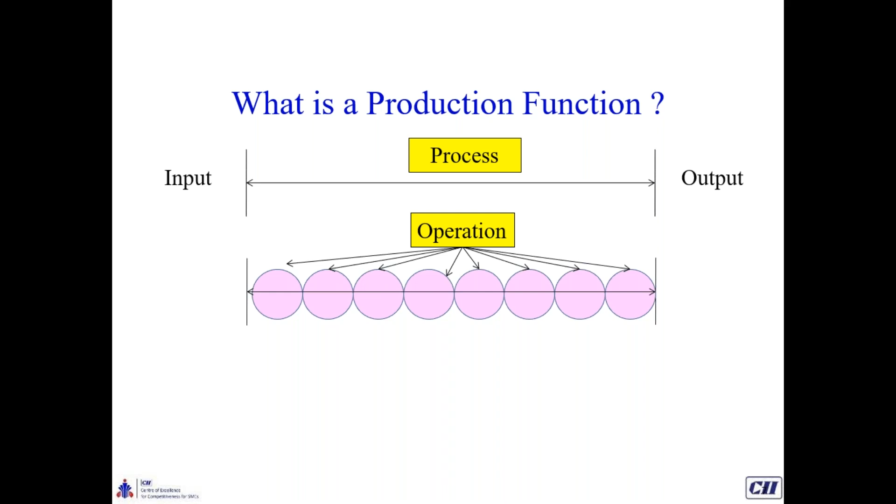And each operation is completed by an n number of activities. The process is input to output. A process is a summation of operations. There may be n number of operations to complete one process, and each operation may be carried out by

a number of activities. For example, if I want to drink water from a bottle, what I do is I pick up the bottle, open the cap, drink water, close the cap, and put it back on the table. So for a single operation of drinking water, I do a number of activities. Same is the case with drilling also.

For example, in drilling, what we do is we pick up the piece from maybe some trolley, put the piece on the vise, close the vise, use the handle to bring the drill down, drill the component, take the drill back to the original position, open the vise, put it in the next bin. So for doing a simple drilling operation, I need to do a large number of activities, and each activity is considered to be done in 4 to 5 seconds.

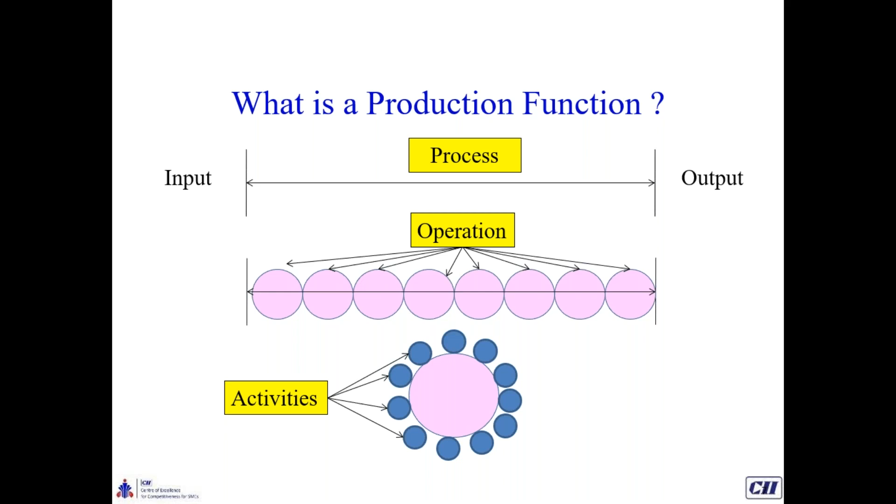When we say activities, the activities are further divided into 3 parts. They are value-added activities, non-value-added activities, and non-value activities in a waste form. For example, of a drilling machine: we have done 8 to 10 activities in drilling one component, but the actual activity which added value to the product was only one, when the drilling was done in that component. All other activities, from picking up, putting on the vise, closing the vise, bringing the drill down, are NVA.

But all NVAs are not waste. Some are essential also. For example, if we need to bind the product on a vise, that is an essential activity, although it's non-value-added. What is value added? Value added activities are those for which a customer is paying us. So in the case of the drilling machine, only one activity, when the drill enters the product and drilling is carried out, is value added. Otherwise, all activities are NVA.

But from those NVA, certain activities are essential. Essential means those activities without which value addition activities cannot be done. For example, we need to hold the product in a vise for the value added activity to be done. Okay, so that is NVA activities.

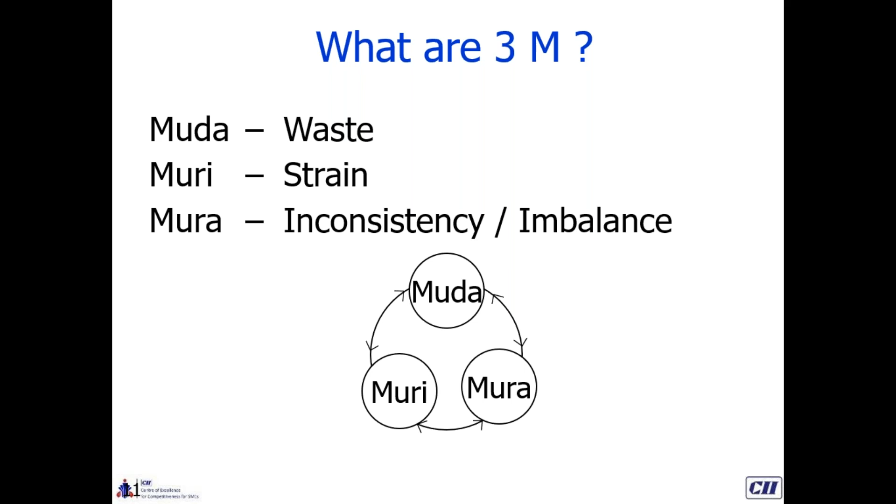Have a brief understanding of what Muda, Muri and Mura means.

Let's take an example. You want to transport 12 tons of material, each unit being 1 ton, from one plant to another using a truck or lorry with a 4-ton capacity. So we have three options available.

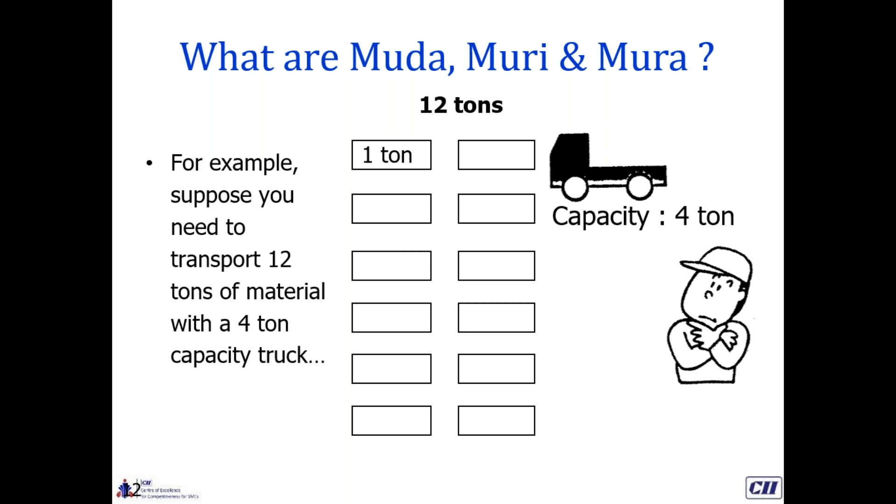One option is to transport 6-ton material in 2 trips. Making 2 trips carrying 6 tons at a time is Muri, because we have overburdened the lorry capacity, which was originally 4 tons, by putting in 6 tons. That is an example of Muri. Muri means overburden or strain.

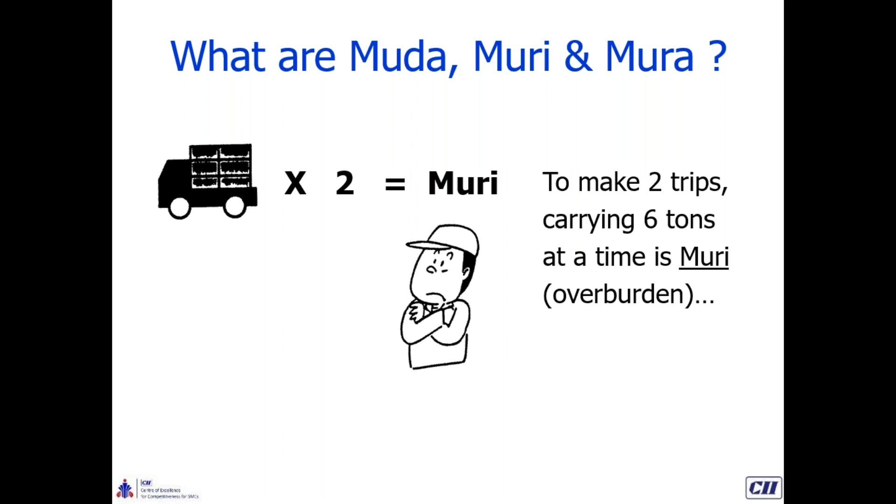Then there may be an option of sending 2 tons of material through 6 trips. This is an example of Muda, or waste, because our capacity was 4 tons, but we are using that lorry to transport only 2 tons at any given point in time. This is a classic example of what we see in daily life.

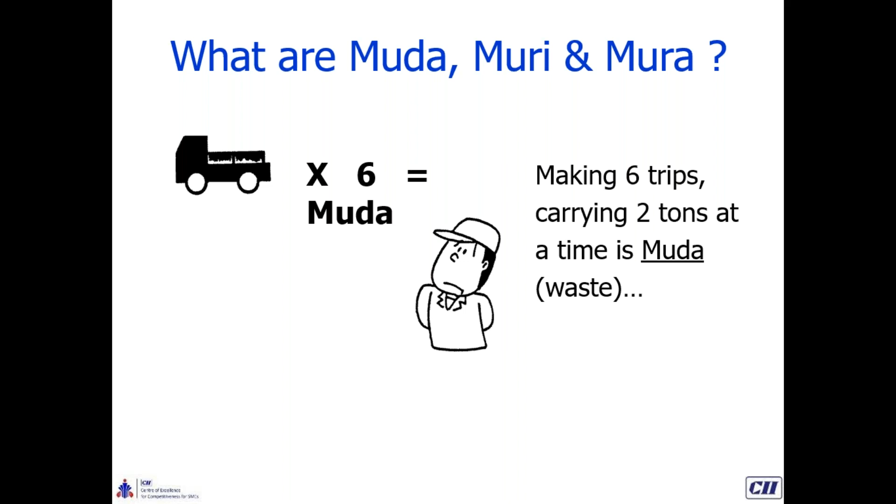We may have a truck of bigger capacity, but when our customer is asking for material, or the material is in short supply, we send whatever is made available by the production department to the customer. We don't consider at that time what the capacity is or how much we have to produce, whether capacity is being lost or not. Sometimes we even send material by air or by train just to fulfill our customer's needs. This itself is an example of Muda, where we are not able to utilize our logistics capacity to the fullest.

Then there may be a possibility that at a given point we send 2 tons of material one time, 6 tons another time, and 4 tons a third time. This is a mixture of both, that is Mura, or unevenness, sometimes more, sometimes less. This example of Mura is also commonly seen.

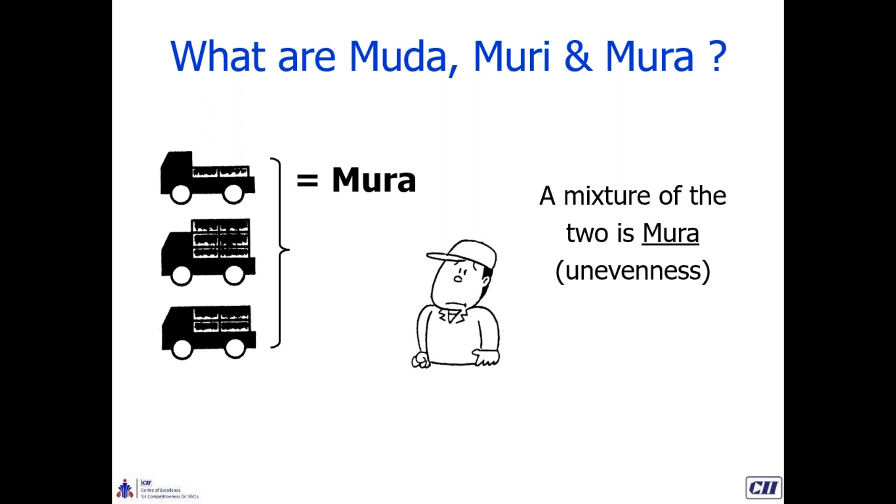Now what is the best example, the best case scenario? It is when 4 tons of material is sent in 3 trips, so there will be no Muda, no Muri, and no Mura. Sending 3 trips carrying 4 tons each eliminates Muda while not causing Muri.

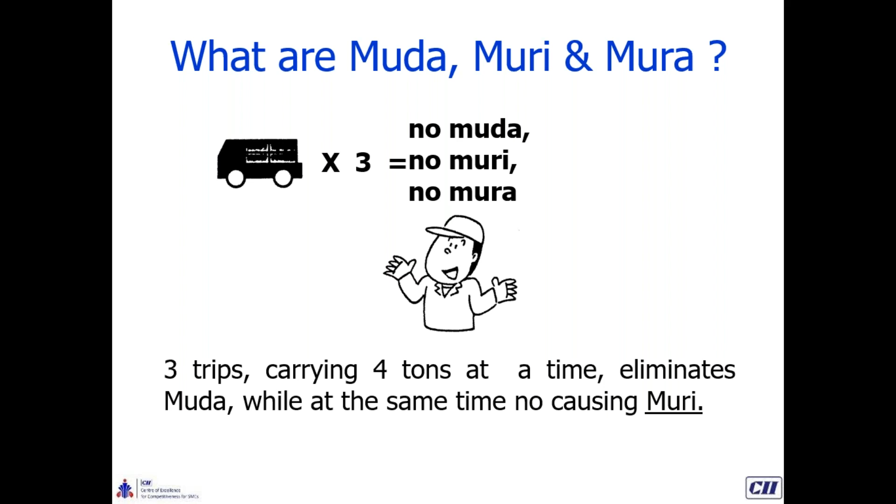Achieving such a balance in the company is one of the prime aims of TPS. TPS, or the Toyota Production System, always encourages employees to work toward the elimination of the 3Ms, so that waste is brought down and overburdening of employees is avoided at any given point.

Now what is Muda? Muda is operation of work plus waste. When we do work, it increases the value of production, but Muda increases the cost of production. So we have to ensure that Muda is not evident in our system, so that our cost of production doesn't go up, which would otherwise impact our profit, and eventually improve our bottom line and top line.

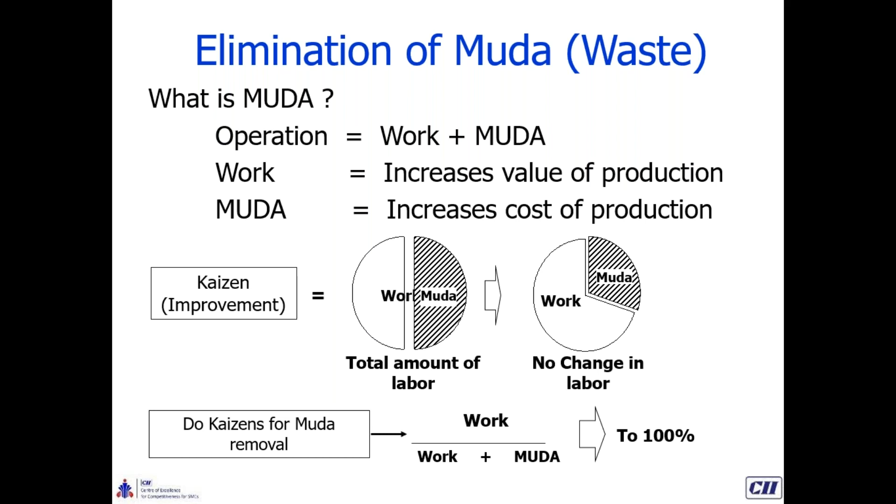Now, types of Muda. When we say Muda or waste, there are a few types that have been devised. I will discuss them one by one.

The first is T, Muda of transportation or conveyance. In our plant, we see many people moving from one place to another, carrying, dragging, or pulling products from one station to another. The question is, if a person moves a product from one place to another through a lorry, lifter, or any means, does that movement add any value to the product? No, the movement does not do any favor on it, it doesn't add any value. That means this activity is entirely a waste activity, and it only adds cost to our system without helping us.

Neither does the customer we supply to pay us anything for transportation of material within the plant. You will see many people moving product from one place to another, normally called helpers. If you go back to the plant and check the ratio of helpers to operators, you'll find 40% of people are doing activities which are non-value-adding, involved in moving product from one place to another, which can be avoided. Now the question is how to identify how much Muda of conveyance or transportation is evident in the plant.

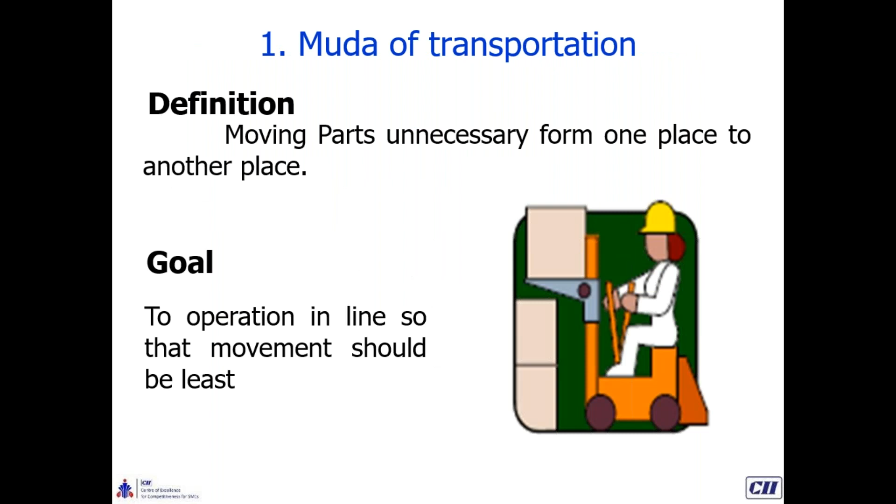The second waste that is normally evident in a plant is stock, the inventory. It's a very soft issue that we see in our plants. Many plant people, production engineers, or managers feel that inventory is a boon, while some may say it's a pain.

Then the question arises: why do we keep inventory? Normally, when we go to plants and ask the team this question, they say inventory is required because we want to fulfill our customer demands as and when required. Good, when we say good, okay.

And what's your delivery schedule adherence? They say 85%. So in spite of keeping inventory, companies are not able to fulfill customer demand, because what is kept in the plant in the form of inventory is different, and what the customer is asking for is different. So quality of inventory is also a factor when we say the muda of inventory needs to be constant.

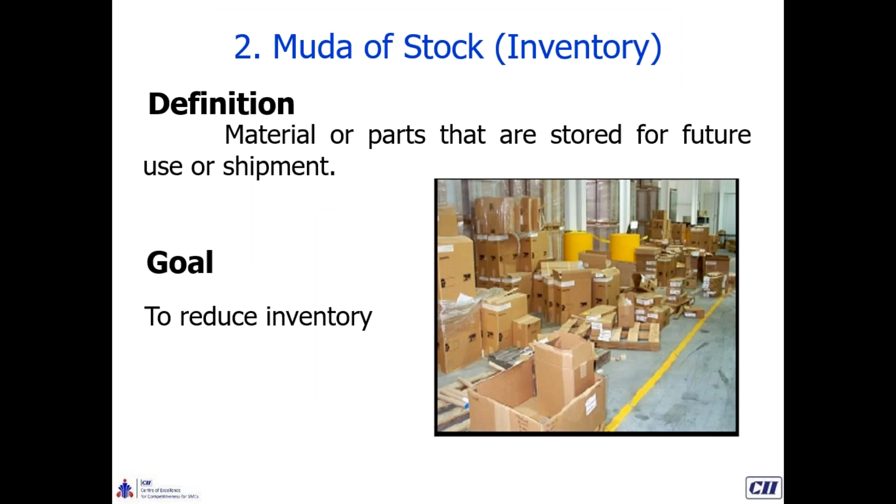So coming back, when we say muda of inventory, we have to consider what is our ITR. ITR, as I told you, is a ratio which suggests how much our money is moving in a particular year, how many times the movement of money is there in the cash flow in a year. 12 ITR means 12 times in a year, which means once a month.

24 ITR means 24 times rotation of money in 12 months, or average inventory is 15 days. And if the ITR is 6, that means our inventory is 2 months.

So this inventory needs to be checked at an audit. The inventory cost we are incurring needs to be brought down to a lower level. So once the lockdown gets over, inventory will be a major issue for the plants because all of the manufacturers or entrepreneurs may be having a cash crunch.

In a major way, we need to change the level over time so that inventory is kept at a lower level.

The third waste which we see is muda of operations, or muda of motion. Motion suggests that our operator is moving from his place to do other work, and during that movement the machine is stuck up, the machine is kept idle, and that is counted as waste.

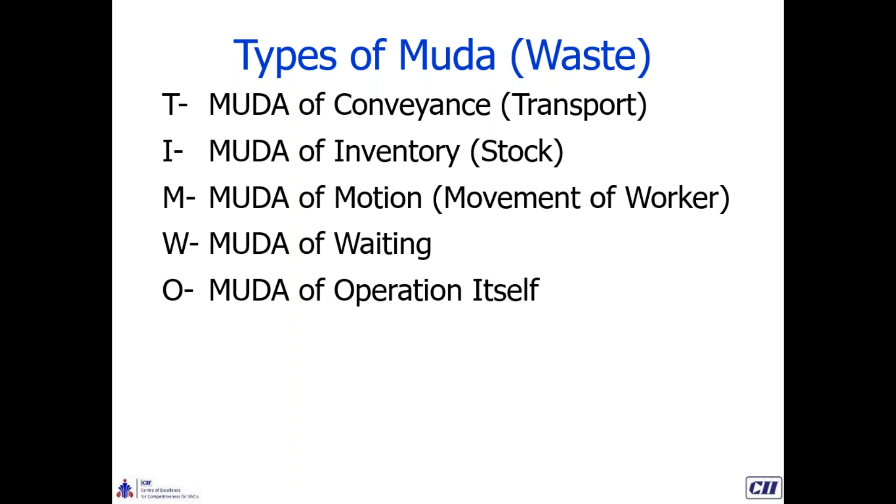And what we need to see, after going back, is how many additional operations we are doing in the company which need to be eliminated or reduced so that profitability remains intact. For this, check whether the operations were initially part of the process or not, and if they were added later on, why they need to continue for so long, and why don't we go for an improvement in our system so that these operations are eliminated and we are back to the starting phase where our process had a limited number of operations.

The next waste what we see is muda of overproduction. Now, many of the companies who are into lockdown right now may be having products that are perishable. Perishable means those products have a sustainable shelf life of maybe 15 days, 12 days, 10 days. Or some of the products may be getting rusty if moisture is there in the plant. So what we did is overproduction, assuming that whatever we produce will be taken by the customers, and eventually we will be in a good position when some issue arises.

But you never know what happens tomorrow. So overproduction may sometimes be a risk for us also. Also, we assume that the customer will take whatever we are producing, and the customer sometimes abruptly says now we are going for a new product, or doing some design change, so we don't need the product we were supplying earlier. And finally, all the products which we have produced in excess of what was desired by the customer are kept lying in our stores or plants.

So whenever we go to the plant for some assignment, we ask them to go for red tagging, and during red tagging we see that 30 to 40% of the products mentioned in the red tagging sheet are products which were produced in excess, and when the customer reduced the demand or refused to take the product, those products remained in the system, and were sold at 1/10 or 1/5 of the actual cost. So this overproduction is, you can say, the biggest waste we normally see in the plant.

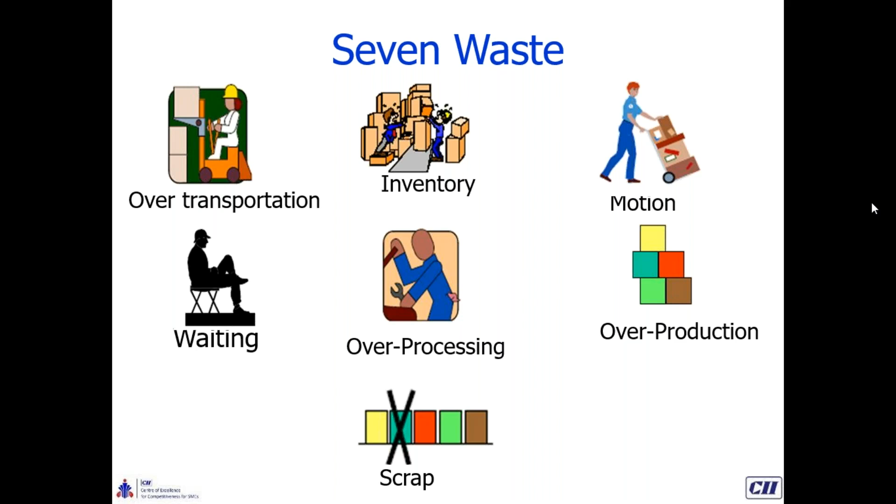So what we say is not only the movement of operator from the station itself. Also, the operator working in a sitting position, that is also waste. Many of the times we see that operators are sitting on the floor, on the table, or on the bench, doing assembly work. So what we need to ensure is that all operators should work in a standing position, because it not only affects productivity but also safety of the operators.

There is a study done that if working in a sitting position versus a standing position, there may be a jump of around 8 to 10% of productivity improvement. So we have to ensure that all our operators are working in a standing position. Also, turning around, walking, lying down, bending, choosing, searching, these all types of movement of operators should be avoided. And this we will see or detect when we go for a video.

So the key is you go for videography. After that videography, what we do is in the subsequent slides.

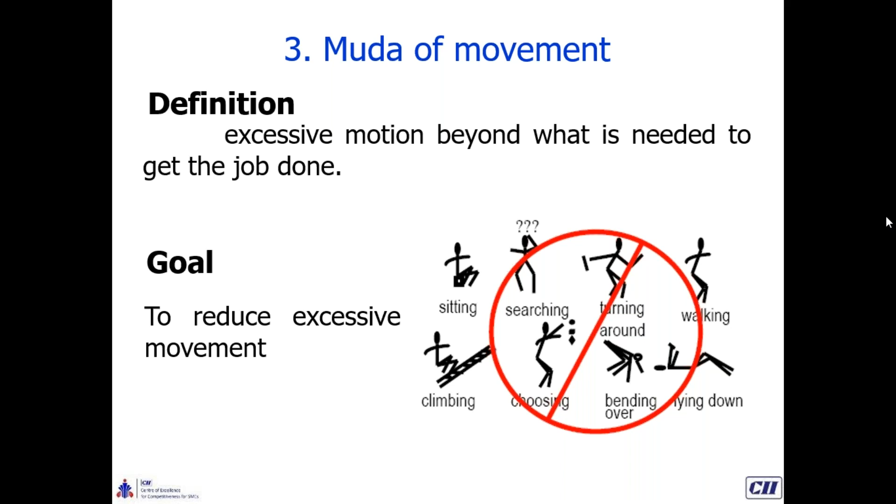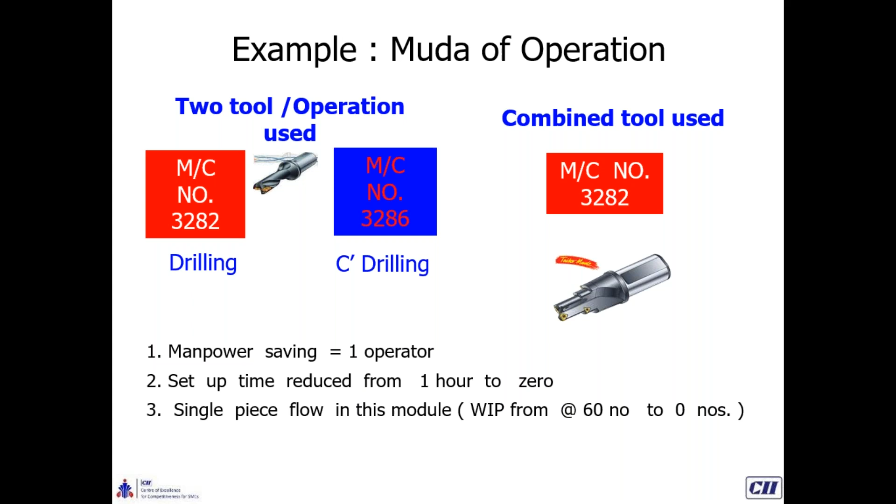Now these three types of waste that I discussed, Muda, are defined in different ways, and company is defined at different tasks. For example, that waste need to be identified and removal of Muda is the prime responsibility of operator and whatever the waste

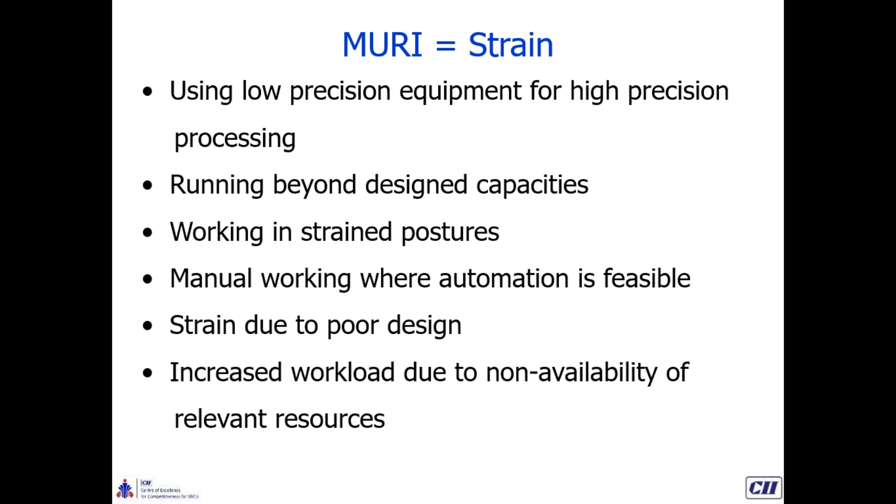So what I was saying is three different hierarchies exist in the plant: lower management, middle management, and top management. So Muda or the waste is the responsibility of lower management. Lower management means people who are actually working on the shop floor. They may be supervisors, they may be operators, and those operators and supervisors need to identify waste in the plant, and those waste should be eliminated with the support of middle and top management. So identification of Muda or wastage is the responsibility of lower management, and they may be seeking support of middle management or top management to remove those waste.

Mura or unevenness is the responsibility of middle management. Middle management means those people who are into management level, for example, HOD, plant level, section head. They need to identify why there is a difference in production on an hourly basis. They need to identify why there is a gap between skill set of different set of people, and if that skill set is having a gap, then what impact they are having on the productivity. Also, they need to identify that none of the section or areas should be such where there is less work given to any set of people and more excess work given to any set of people. So the removal of Mura, unevenness, is the responsibility of middle management. They may be seeking the support of lower management or top management to remove Mura, but responsibility lies with the middle management.

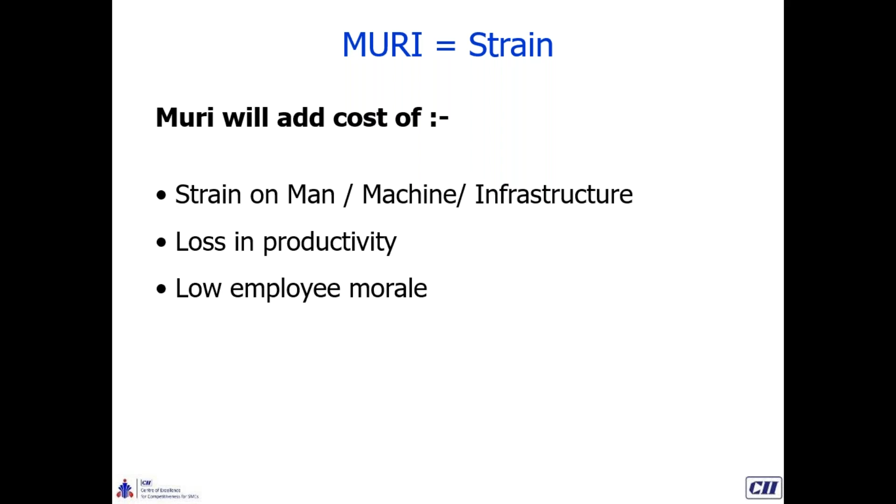This is an example, a common example we see in our systems. Operator is working on the floor in a strained position. So these few examples that I am sharing with you are common examples, and we can see in many companies such examples. So if you want this operator to be working at 90% efficiency or 85% efficiency in the plant and able to give the full productivity you're expecting, then you need to ensure that he is not in a strain and his proper posture or proper work system is designed so that he can work effectively in the plant.

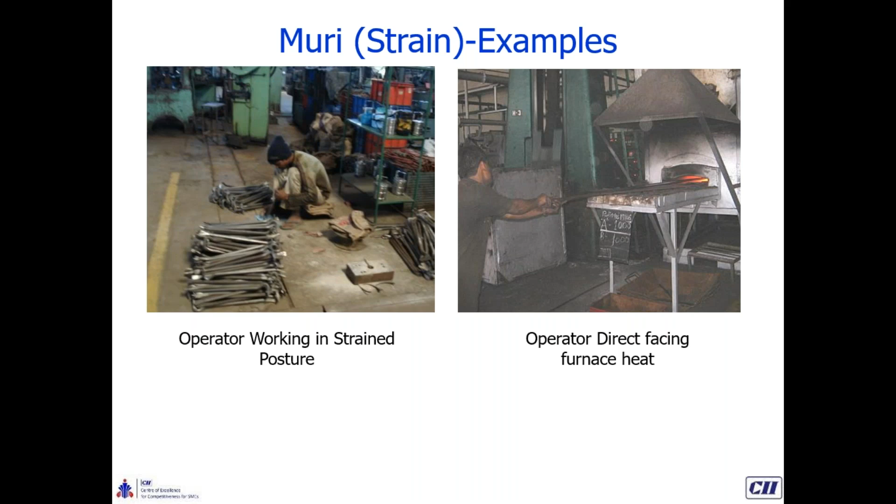Now I would like to show a video to you. Okay, and this video I will be running for around 2 minutes again and again for you to understand.

Vikas sir, this video is lagging a little bit. Andy, it is lagging sir.

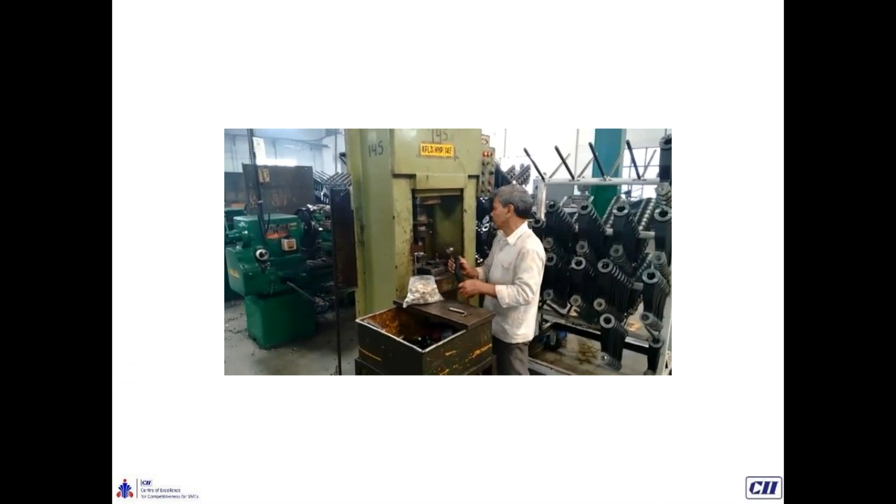Now you must have seen this video. The question arises how to identify 3M in the plant. When we say we have seen what are the waste in the plant, what is Mura, what is Muda, what is Muri, the question next arises how to identify 3M or how to identify areas of improvement wherein we can improve our productivity, quality, cost.

What do you think? Start with the implementation of 5S. So the first area we need to focus on is implementing 5S. This will help you in distinguishing the waste from the saleable job or value-added activities. Then we can go for visual study, time study, or motion study through videography, which is the best example that will help us identify waste in the plant.

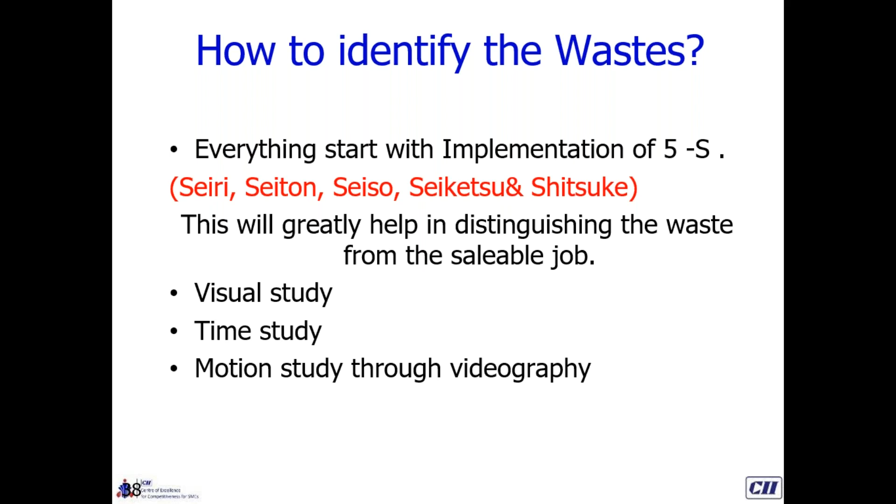Now you must be seeing a sheet is shown. This sheet is called the operation analysis sheet. In this sheet, the first left corner shows operation description, then operator name, then product name, and date of movie taken.

So what we need to do is a videography, and in this sheet fill up the columns that are mentioned. So first we will mention the operation description we have done the videography for, who was the operator, what was the product being manufactured, and when was the movie taken.

After this, we need to identify activities in that video, and each activity may be of 1 second, 2 seconds. The smaller the size, the better it is. So we'll identify activities in that video during 1 cycle completion of that product and list them down here. The next item shows start time, HMS. H means hour, minute, and second. Next is end time, hour, minute, and second. So for each activity, how much time is taken, we have to list it down here.

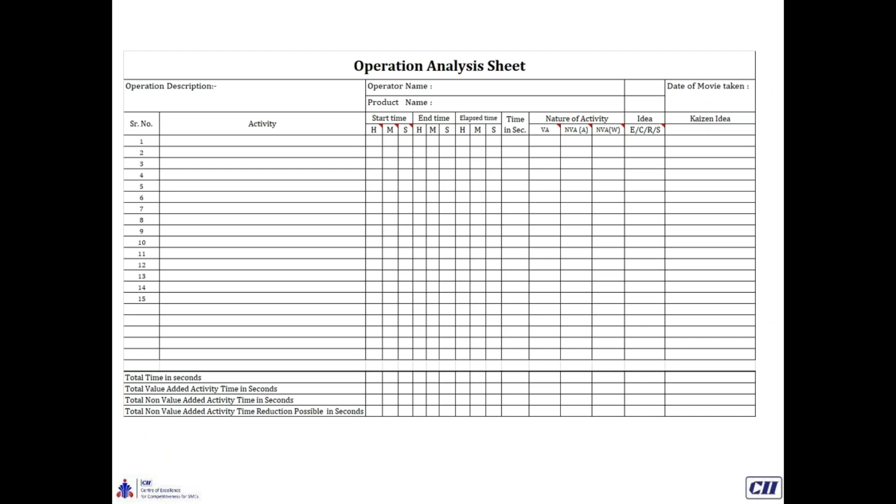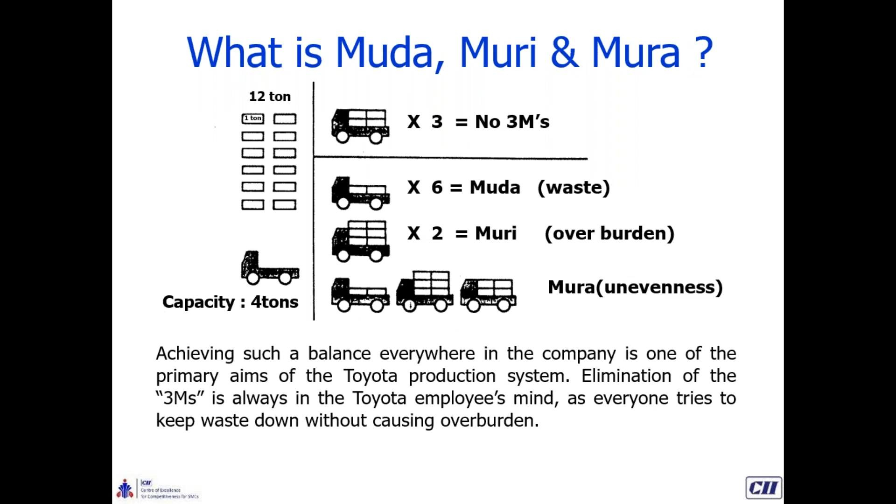One thing I would like to come back to: when we say we have identified 7 types of waste, what we need to do when training our employees, operators, or engineers in the plant, is give them a blank sheet.

In front of each type of waste, whatever they identify in the plant, they should write it down. For example, in front of transportation, they should write down how much transportation, and quantify it. That will help bring people's awareness to the next level as to how much transportation they are doing in the plant.

In the same way, inventory we need to identify in the form of red, green, gray. Red inventory means it is in non-usable form. Green inventory means it is usable within a few days or within 1 week, and more than 7 days is gray inventory.

So if we can quantify everything in measurable form, that will help in removing the waste, and will also help identify waste and arrive at accurate measurement and accurate solutions for them.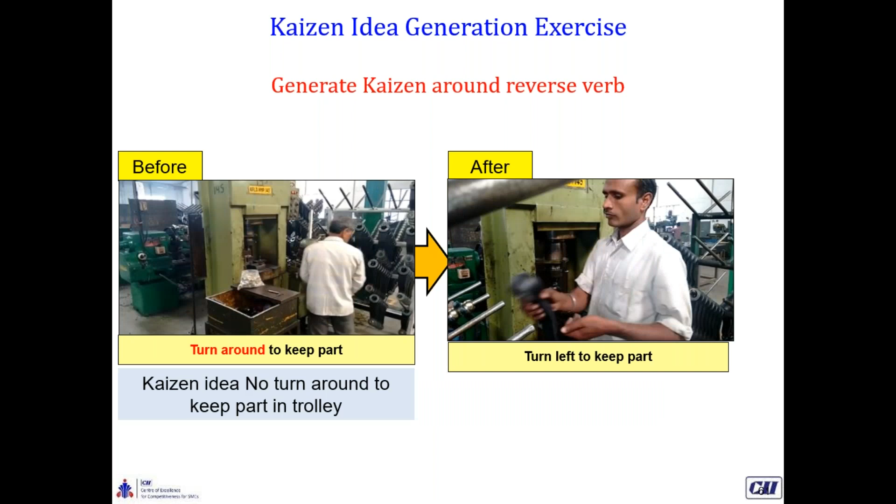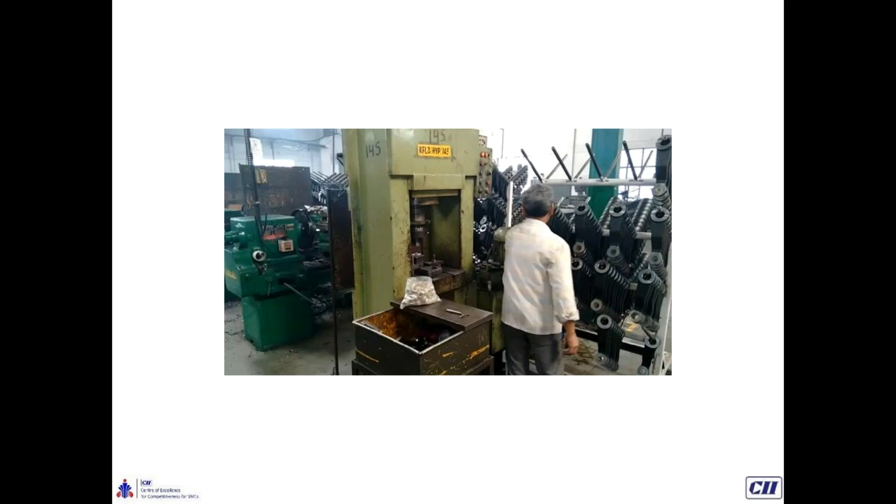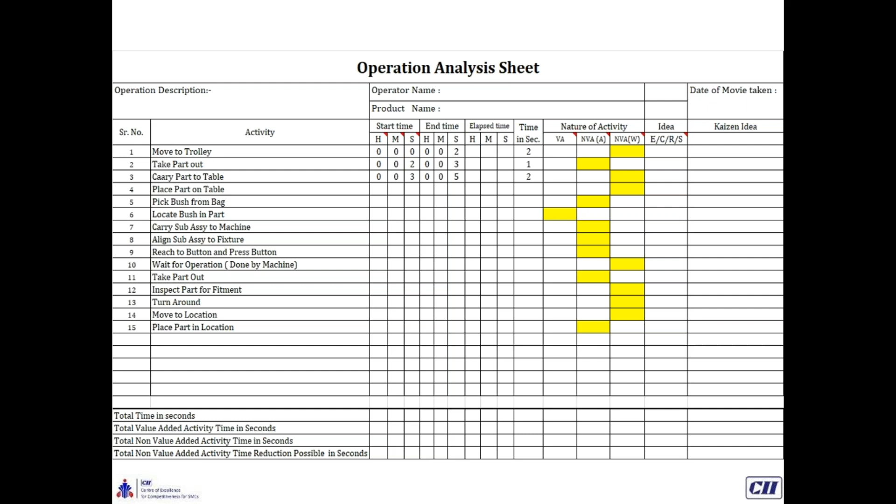Now, when we say we have identified the waste in the system, the next question is how to eliminate it. In the previous slides, I was suggesting how to identify waste through the operation analysis sheet, which helps identify waste out of the system. The ideas may be ECRS: eliminate, combine, reduce, or simplify. Once this idea is generated, the next step is to go for a Kaizen.

Now, what is Kaizen? Kaizen is a Japanese technique which suggests change for the betterment or continual improvement. You must be aware, having a fair idea of what Kaizen is.

My only input to you is how to identify Kaizen ability. When we talk to companies, they have a good suggestion policy in place and a good team of people available, but the number of Kaizens being implemented or generated is too low. Ideally, the system says for each employee working in the company, the number of Kaizens should be 1. For example, if there are 100 employees, the number of Kaizens generated should be minimum 100, which comes to 1 Kaizen per person per month.

Many companies face difficulty identifying Kaizens - how many Kaizens and how to identify them is their biggest concern. So I will take you through a 5-minute journey as to how we can identify Kaizens through the same video I was showing you.

First step, as I told you, is to make a video. The first step to going for improvement is making a video of operations. Second step would be to break down operations into activities. We have defined activities into 3 forms: value addition, non-value addition auxiliary, and non-value addition waste. After going through the videography, you have to define the activities into these 3 forms.

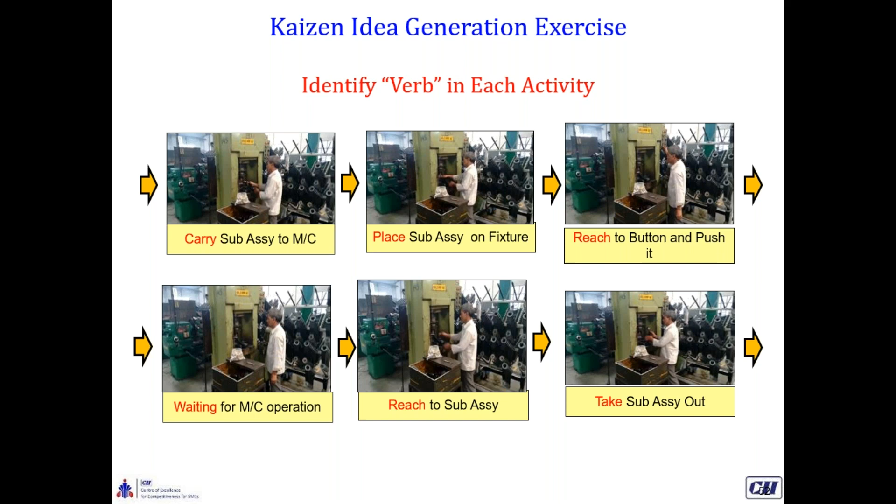Subsequent activities also have verbs: carry, place, reach, waiting, reach, take. So we identified all these activities and the verbs out of those, and those verbs have been highlighted in red.

Now for doing improvement, what we need to do is reverse the verb in each activity. Whatever verb you identified in red, you have to reverse it. For example, where it is written 'move to trolley', against 'move', the reverse is 'fix'. So we have written it as 'move to' against 'fix'.

Take part out becomes 'no take'. Carry becomes 'no carry'. Place becomes 'no place'. Pick becomes 'no pick'. Align becomes 'no align'. So whatever activity he was doing, what we suggest is it should be reversed.

First was 'move to trolley for parts'. The reverse would be he doesn't have to move, he needs to be stationed at a fixed position. The part should be in such a position that he should be able to pick it from its own location itself.

Take part out becomes 'no take', carry becomes 'no carry'. So these reverse verbs we have identified in each of the photographs for all 15 activities - carry, no carry; align, reach, no reach; working, waiting, no waiting - everything.

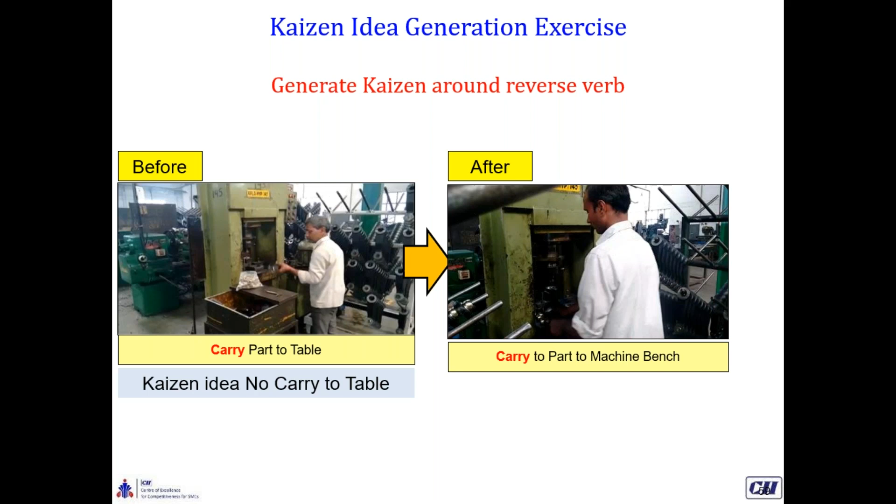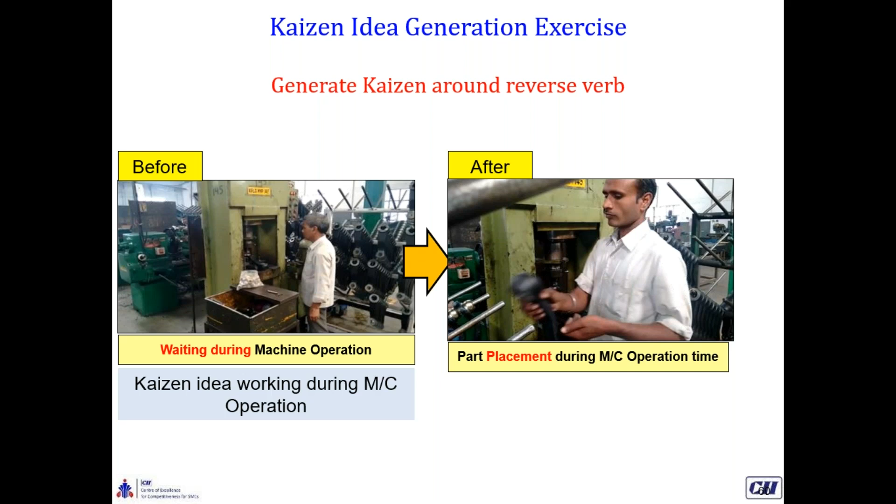So what we have done is identify around 7 to 8 waste activities out of this first video and tried to remove them one by one through improvement, through Kaizen, through this video. And finally, what we could see is the final video.

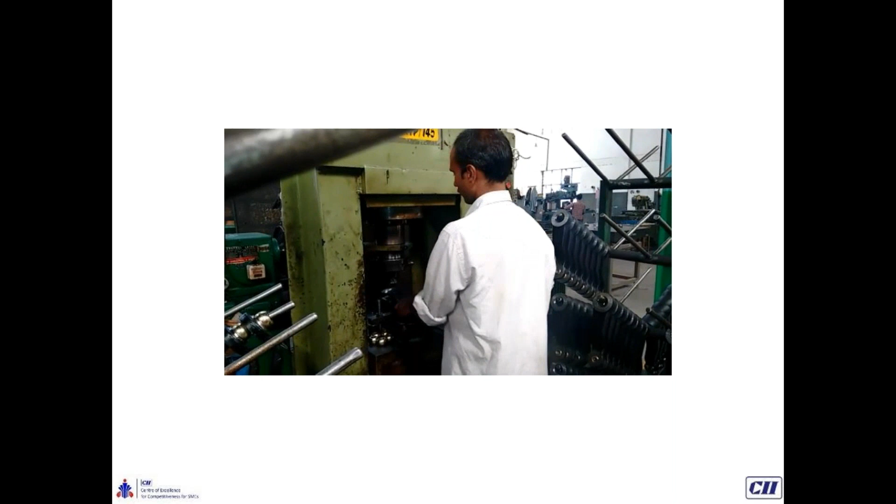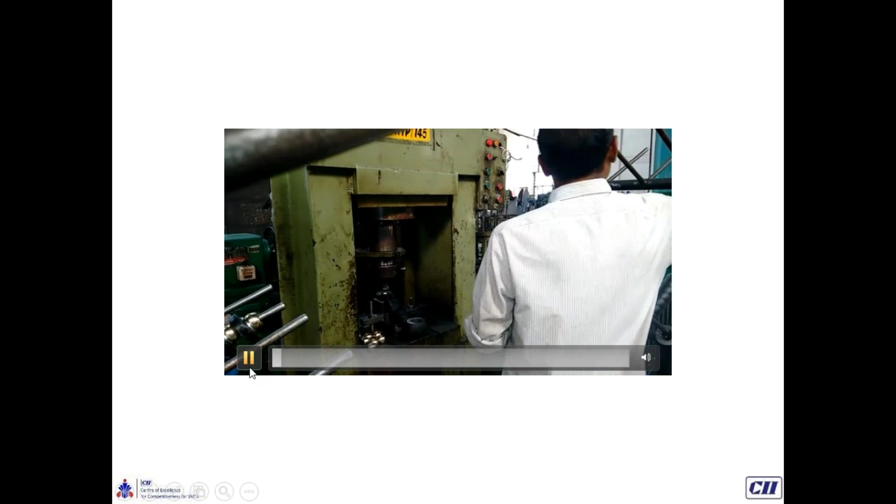Earlier the same operation was done in a 15-second cycle time. Now it is being done in an 8-second cycle time. So around 40% of cycle time has been reduced by doing the Kaizens with respect to reversal of verbs.

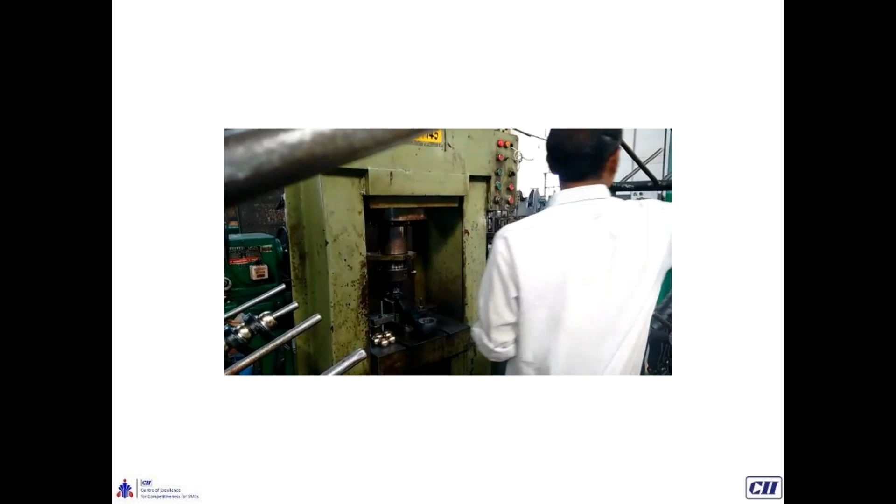So again I will sum up how to identify Kaizens. First, make a video of each operation. Make sure that for each and every operator working in the plant, we make a video. If there are 2 shifts in the plant, we have to make a video of 2 persons on the same machine, because every person works in their own way. It's not necessary that if we have taken a video of one person, another person will be doing the same activity in the same fashion. So we have to make a video of both persons if they are working in 2 different shifts.

After making a video, break down operations into activities. Activities may be VA, NVA, or NNVA.

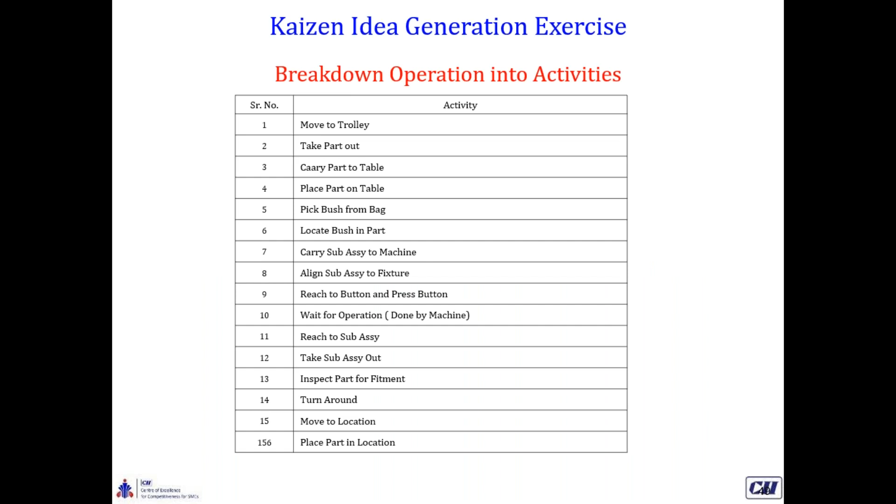Then identify the verb in each activity. Verb means kriya - whatever activity was done, we have to identify the verb. In this example, move, take, carry, place, pick are the verbs we have identified. Once the verbs have been identified, we have to plan for reversal of verb on each activity.

So plan reversal means: move to fix, carry to take or no carry, place to no place, pick to no pick.

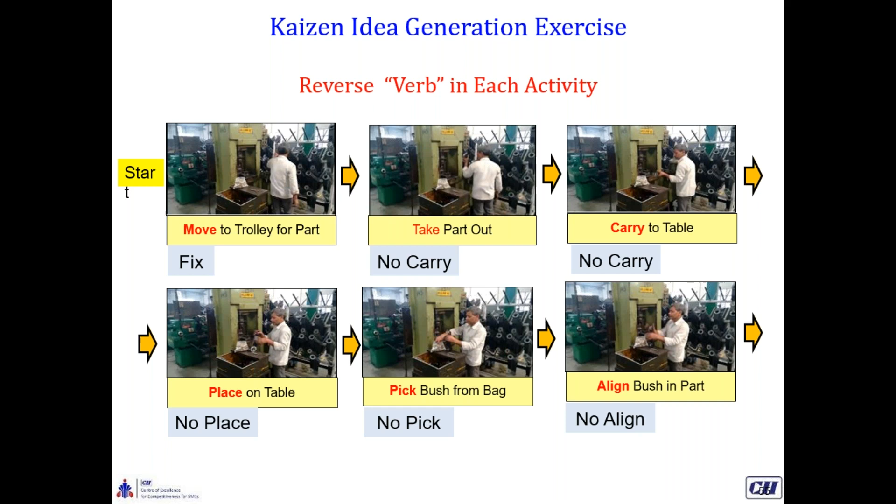Waiting for machine operation - it's working. So when we say he was waiting for a machine to work, we have to ensure he is working during that time also. We normally see in companies where machining is carried out, the operator is standing till the machine is working and just looking at the machine to check if it is working or not. So we have to ensure that each and every activity the operator is doing needs to be balanced with the machine operation. In other words, man-machine balance should be there so that the operator is not waiting when the machine is working.

Also, the multi-machine concept can be used, wherein cycle time of 3 machines can be merged so that each operator is running 3 machines. These are a few examples we can think of when we say we need to eliminate waiting of the operators.

Also, operators sometimes need to be trained or upgraded with respect to skill. Skill level of the operator is also one of the concerns which need to be addressed when we go for a waste elimination activity in the plant.

Also, once we have done a review of activity or identified waste in that operation, it's not necessary that the work is completed - there may be further activities. So after one video is made and improvements are done, the second video is the next recipe for us to go for further improvements. This activity of videography should not be limited to one time only. Every time you go for videography, you will find some improvement possible, which is normally not possible when we go for a plant round with the naked eyes.